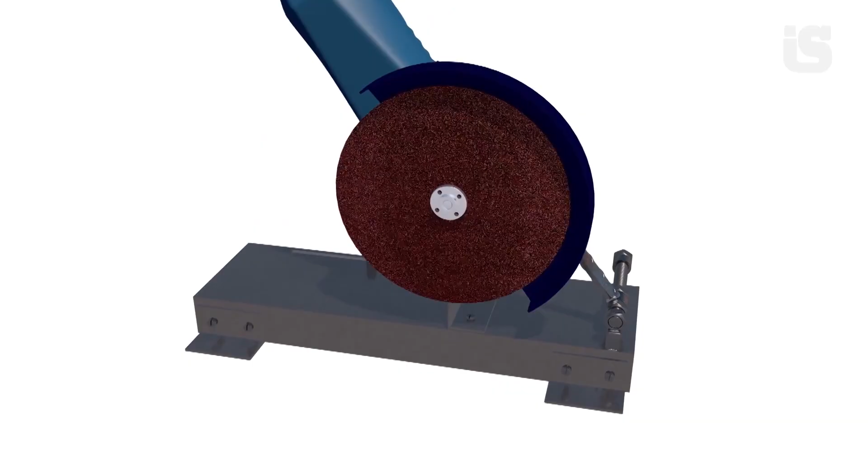How to make an angle grinder stand holder. Using this homemade technology, you can cut pipes, angles, channels, and more. Millions of people don't know about this homemade tool. This video will show you step by step how to make it from scrap materials and scrap metal, and you'll see how easy it is.

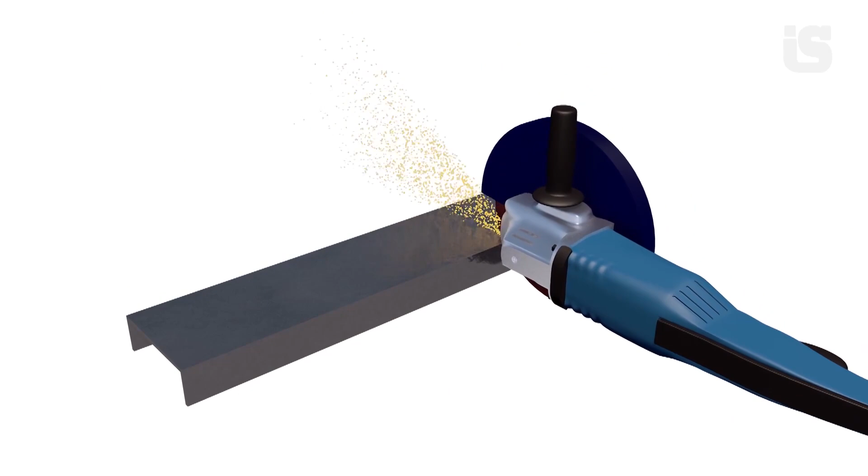What scrap materials you will need: steel channel bar. Cut off a piece of the channel bar with an angle grinder. The size of the cut piece should match the size of your angle grinder.

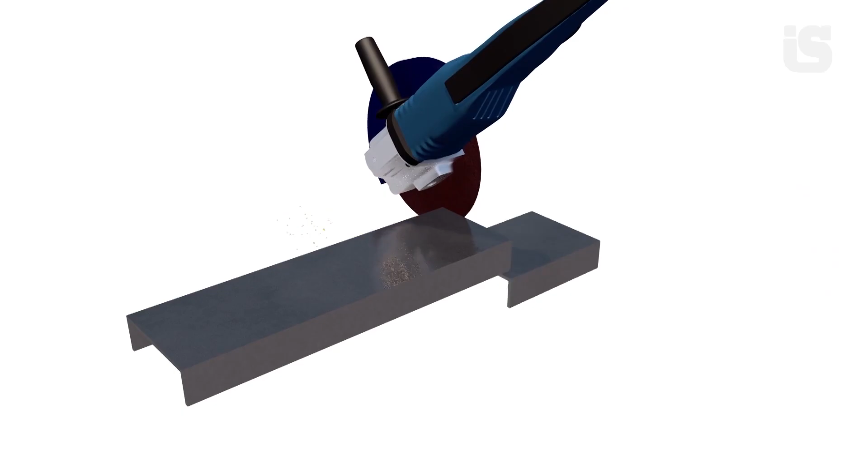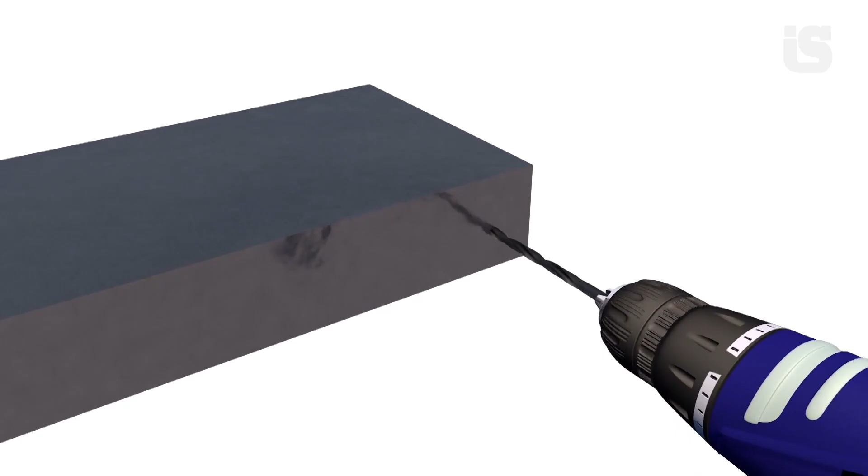Drill holes in the side of the channel bar. These holes are needed for fasteners. Cut threads in the holes.

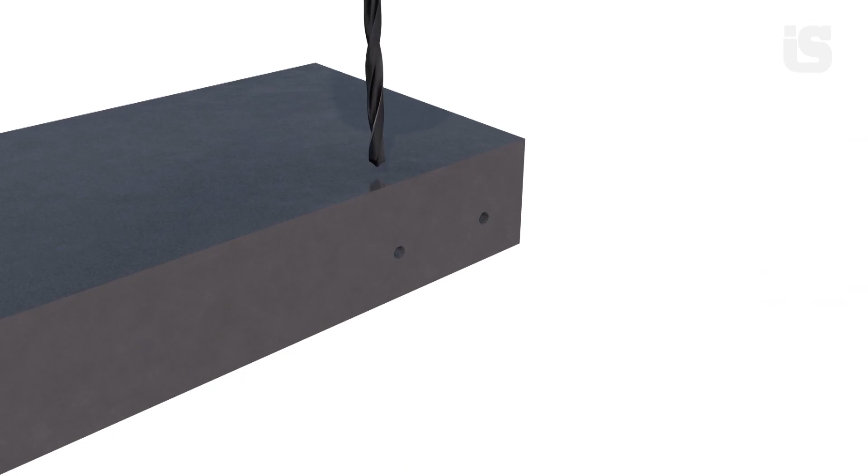Now you need to make a slot for the bolt that will adjust the angle of the cut. First, drill holes at the edges of the slot. Make a slot between the holes with an angle grinder.

The slot should be at such a distance from the edge of the channel bar that the nut of the adjusting bolt does not turn.

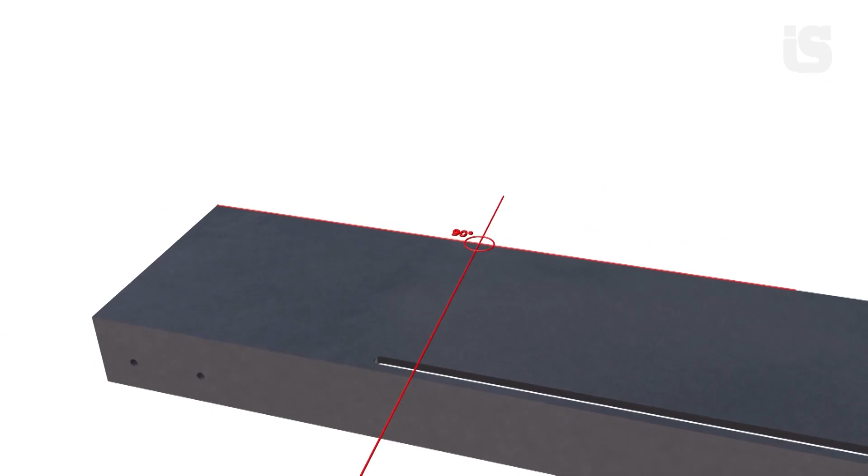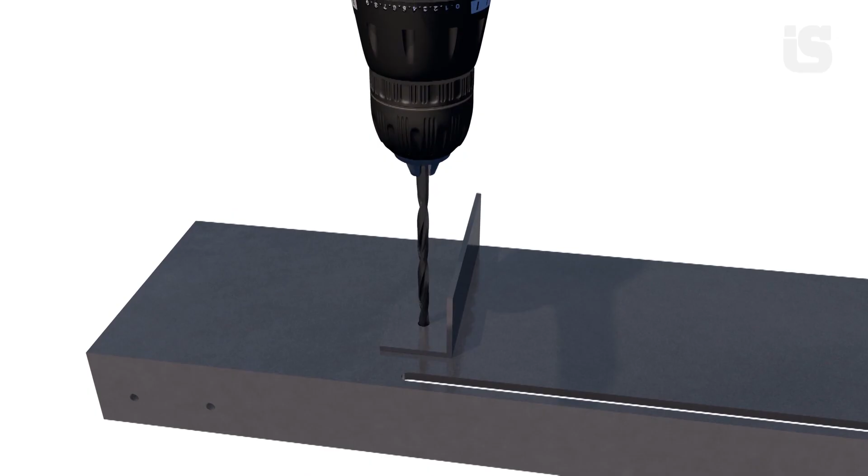Attach the metal support bracket at a 90-degree angle. To do this, drill through the bracket and the channel bar, and fasten the bracket with bolts and nuts.

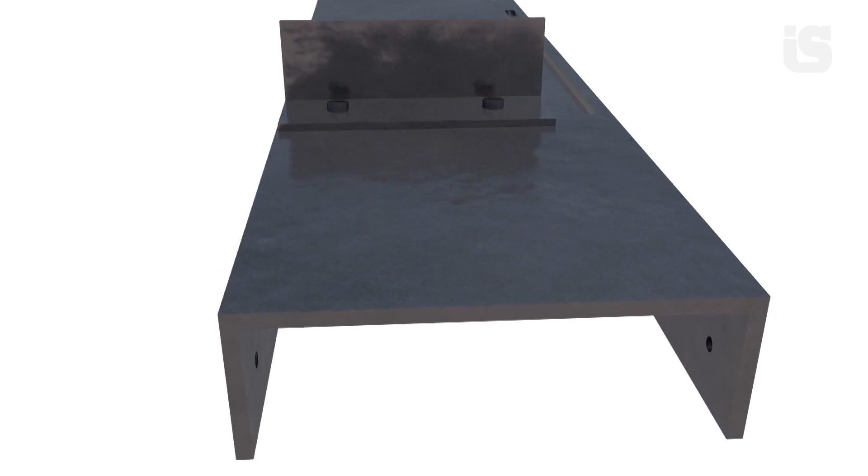Now weld 2 metal blocks of the same height to the channel bar. The blocks will serve as a support for the rotating part of the mechanism.

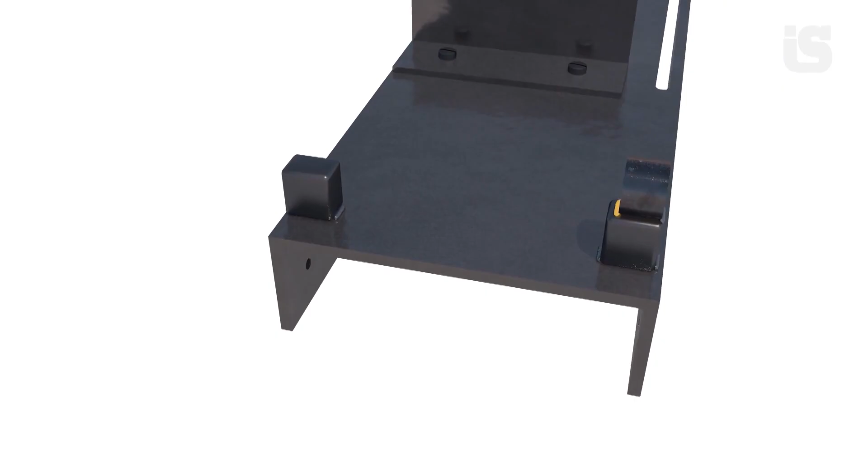Weld a short piece of pipe and a nut to the blocks. The pipe piece and nut must be on the same axis.

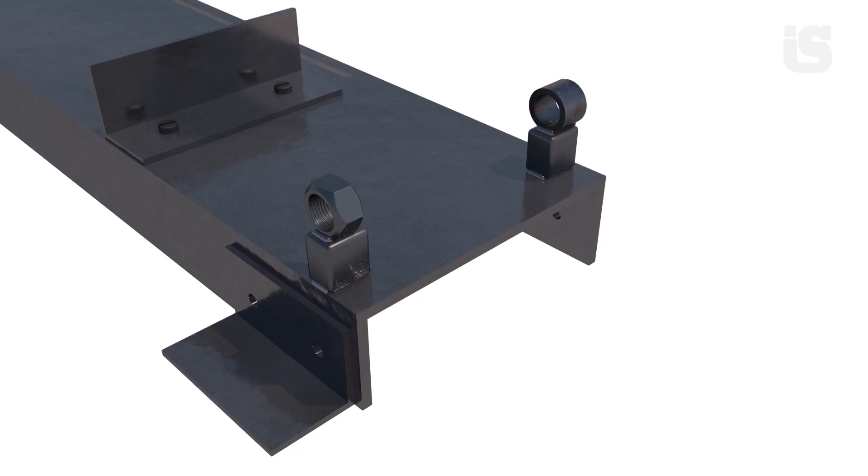Attach the support fasteners with bolts. Install the adjustment bolt.

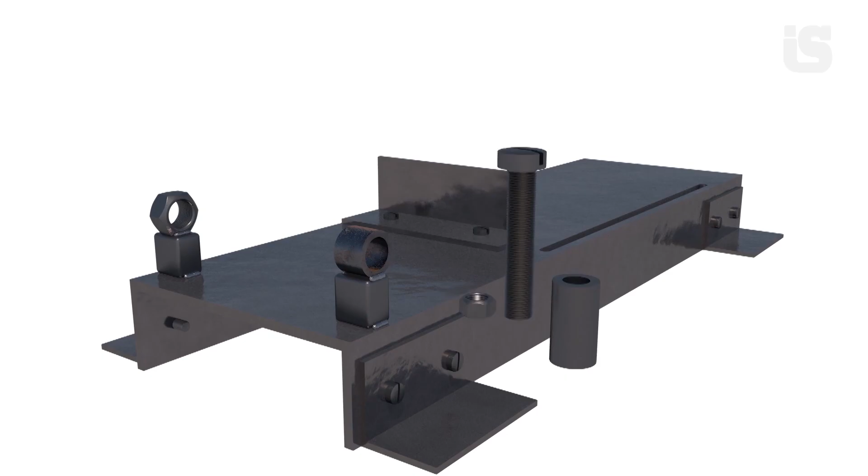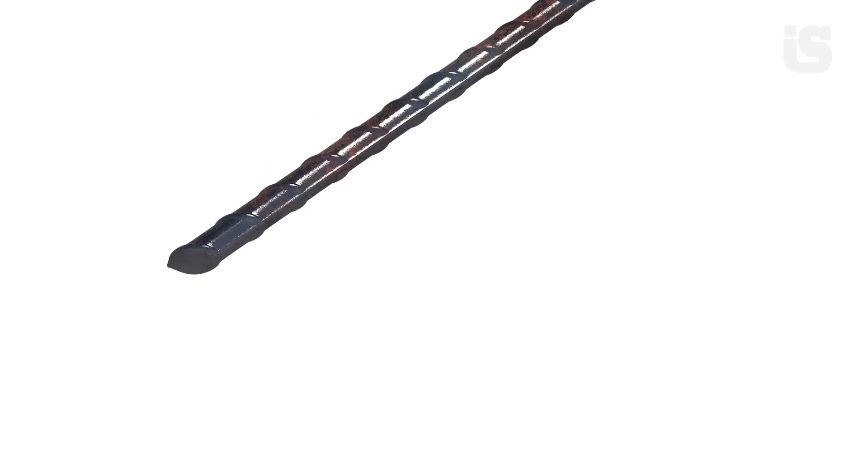Cut off the required size from the piece of rebar. Use an angle grinder to make a recess for fastening in the rebar.

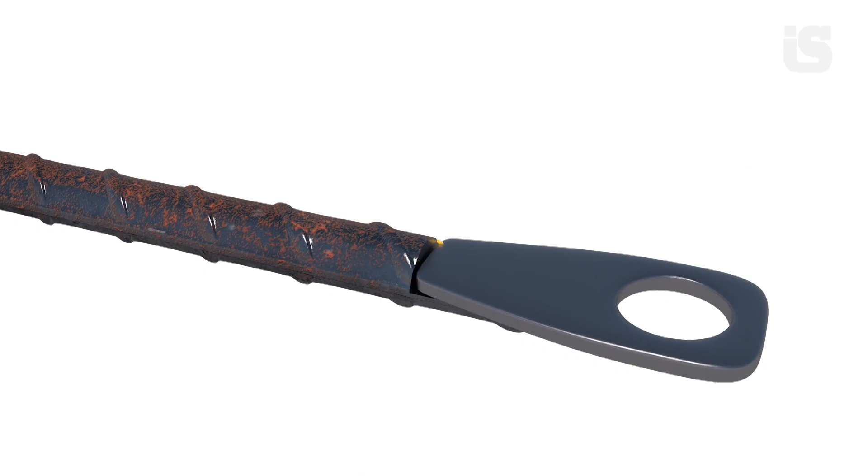Weld the fastener. Weld a piece of pipe to the other end of the rebar.

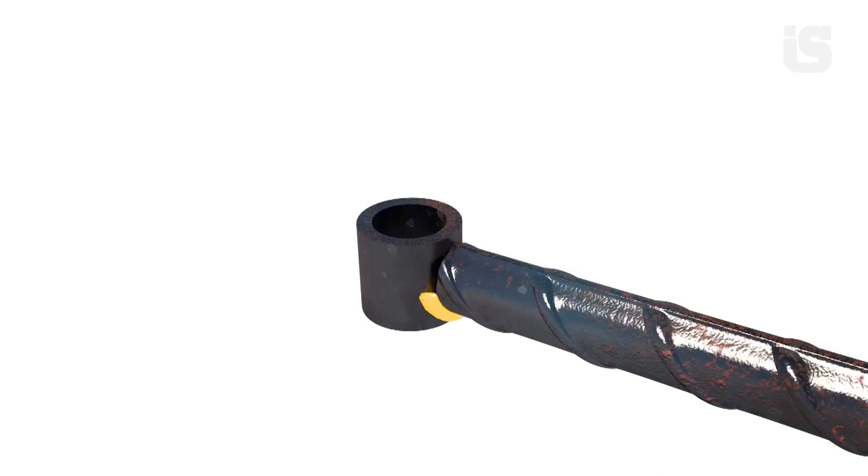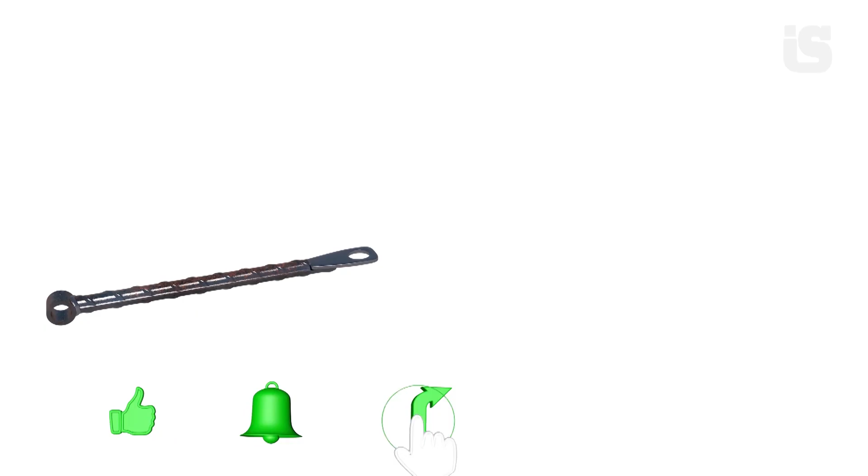Attach the angle grinder to the resulting lever. The inner diameter of the tube welded to the lever must match the diameter of the support bolt.

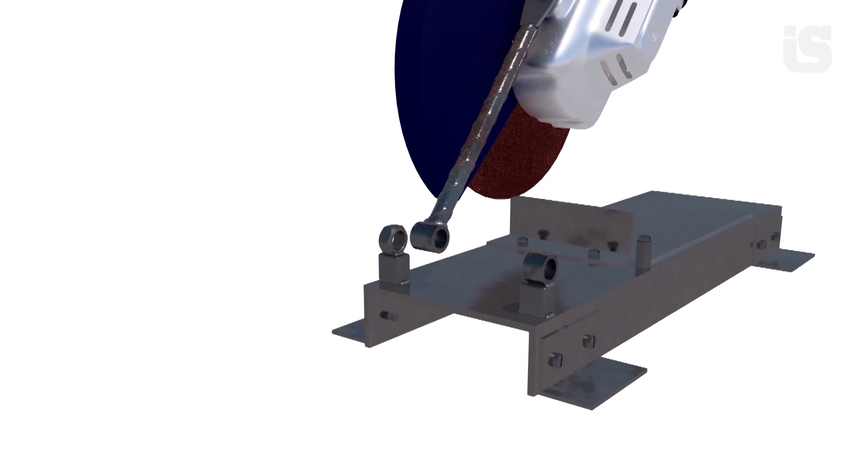Install the support bolt and tighten the limiting nuts. Creative hack and useful DIY assembled.

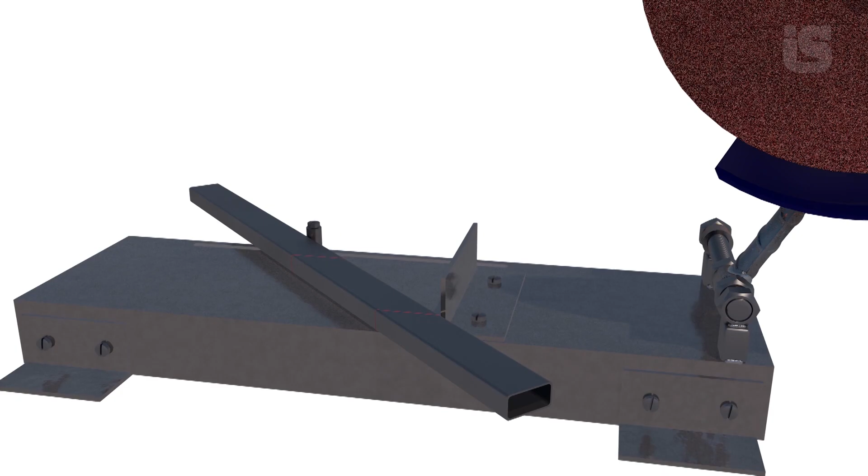Now we will show you how to cut any product at a 90-degree angle and at any other angle.